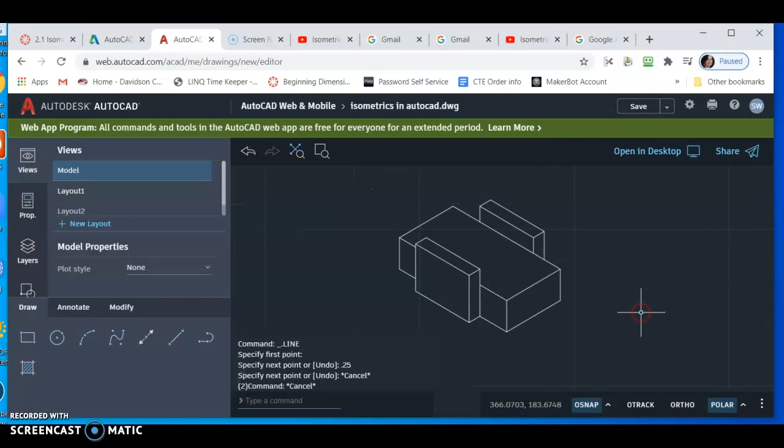At this point, you probably don't need my help anymore, but just in case, I'm going to demonstrate how to draw number 5. So let's zoom out, push the drawing over. Now we have 2, and we're getting ready to do the third one, but number 5, since we're only doing the odd numbers. So let's start with the line tool, and we see that first corner is 0.25.

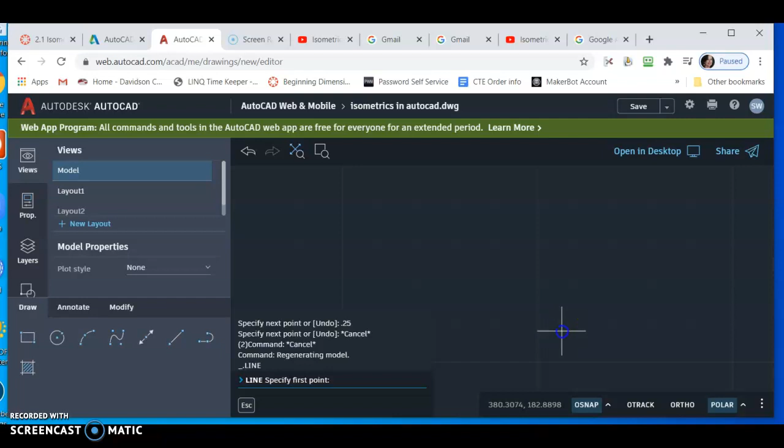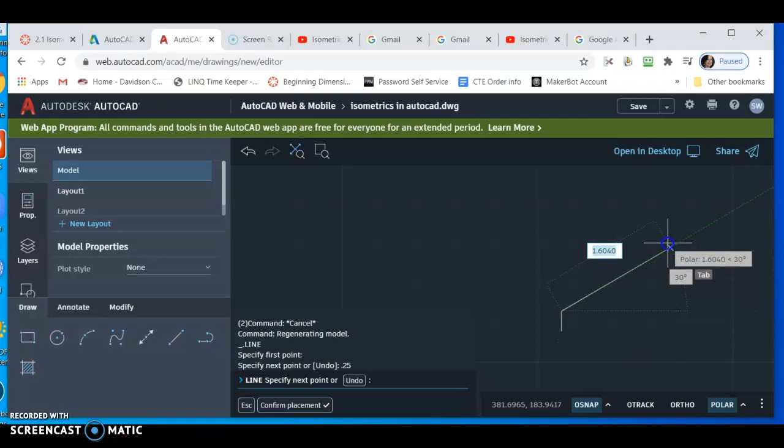Make sure I see a green line so I know that I'm on that 30-degree angle. I don't think we have a dimension on this one, so let's just guess. Let's make it 1.25. Come down 0.25, come back, and join where we started.

So now we have our side. We do have the measurement on the width, so let's draw that at 2 as shown. Make sure we stay on that green line at 2, enter. Go straight up, make sure you see the green line again, 0.25, enter. Come back to where we started there and hit escape.

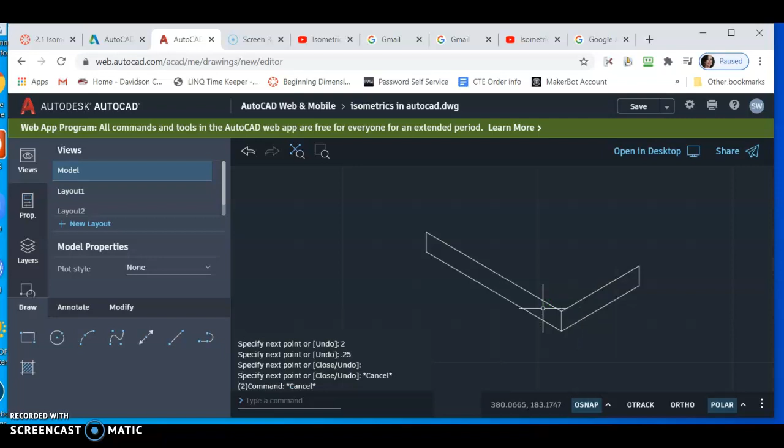All right, so now let's draw some of the top face. Start with a line again, start at this corner, keep it on the green to make sure we're at a 30-degree angle, and that is 0.5. And then I'm going to come this way, and I think that might be 0.75.

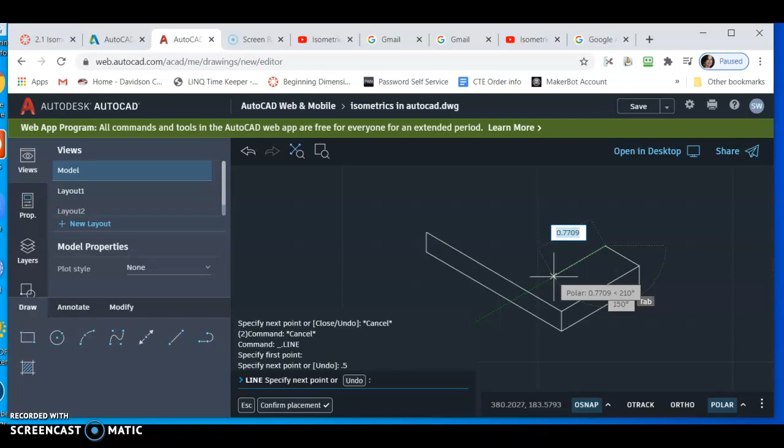It doesn't give us all the dimensions, we're going to guess. And this way we do have a dimension, that's 1. And 0.75 would take us all the way back, which is more than we need, but I'm going to put that in for now.

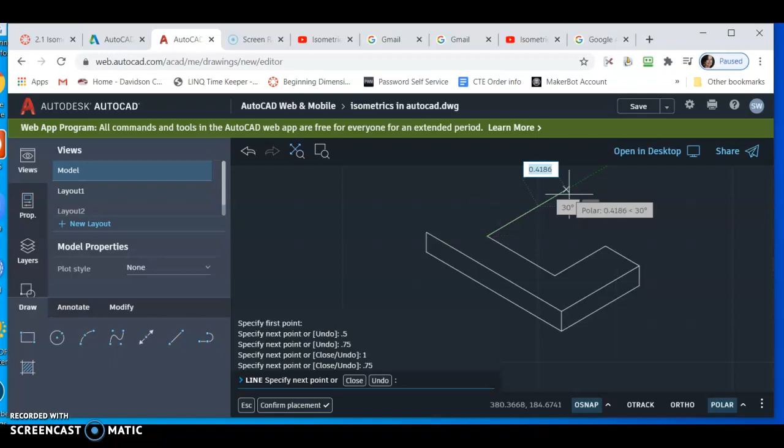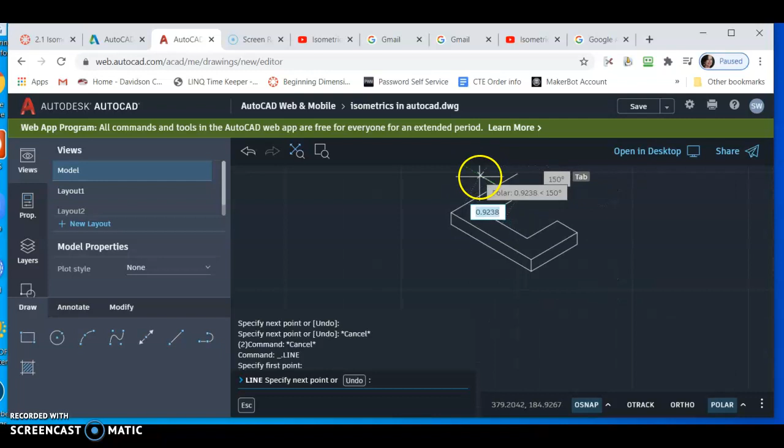And now I'm going to finish off this corner. I'm going to start here, make sure I have it on that proper angle. And I'm not even going to measure it, because what I'm going to do is draw this line at this angle, make sure I've got it on green, and click. Then I'm going to modify, click the trim tool, and do this and this.

Okay, so now I need to think about that vertical plane that's on the inside. So I am going to start with a line, start at this point, and go up 0.5. Make sure it's staying green. Bring it forward, make sure it's green again so it's on that proper angle, 0.25.

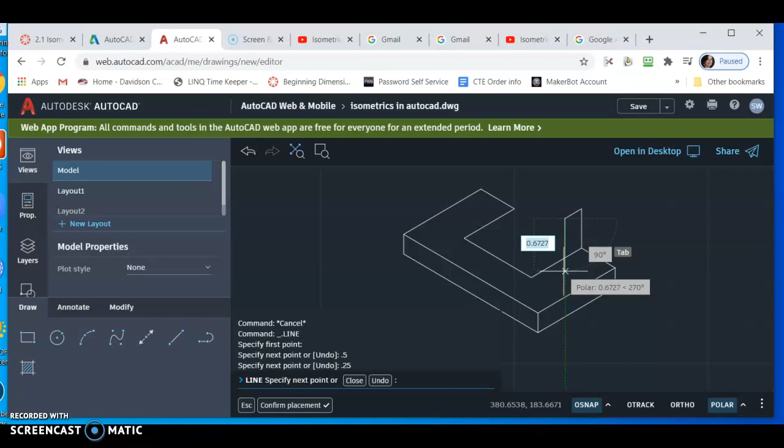And come straight down. And once more, I can make sure it's on the green line, but since I know that that's 0.5 high, if I hit 0.5, it will stop exactly on the line.

All right, now for the top, I see that is 1 wide, so click here at the top. Make sure I've got the green line. See, it just clicks. You don't have to try very hard. Hit 1, enter. Come this way, make sure it's green, 0.25. And back where I started.

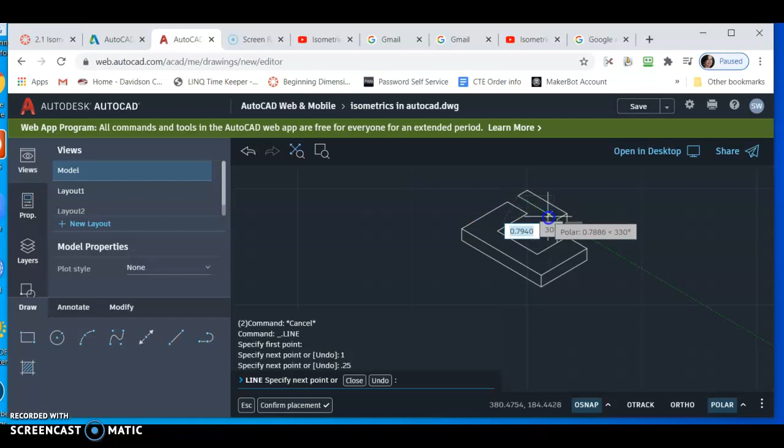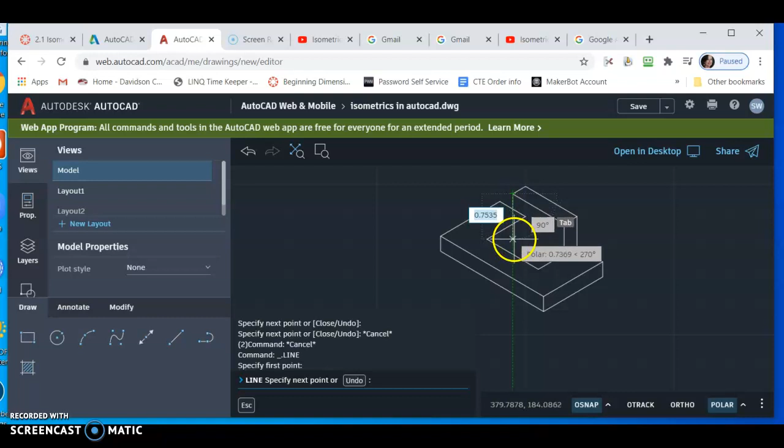Okay, so I know that this is 0.25 high and this is 0.5 high. So that means that this line here, which is going to go all the way down to the ground, is going to be 0.75.

And then I'm going to come in this direction, make sure it's green, because I don't know how much I'm actually seeing. I know how wide it is, but I'm not going to see all of it. So now I'm going to go to Modify, Trim, trim this, this, this. And now it can also trim up here because, see, I'm not going to see those parts because they will be hidden by the solid part here.

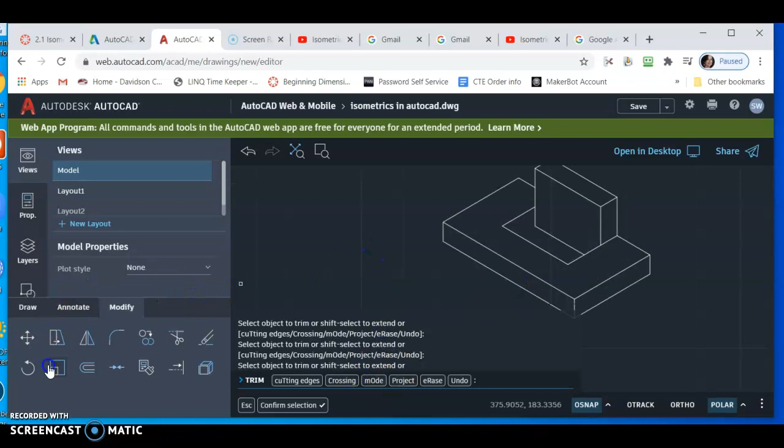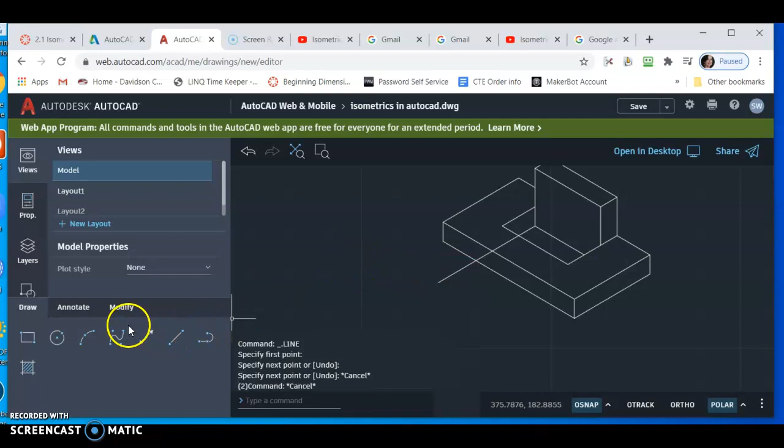One more line to draw and I am done. So go back to Draw, Line, start here. Once more, keep it at that green line showing, and I am just going to click out here because that's easier to see it green. And then I'll go to Modify, Trim, and then just trim that away, everything that I don't need. Okay, we have finished number 5.